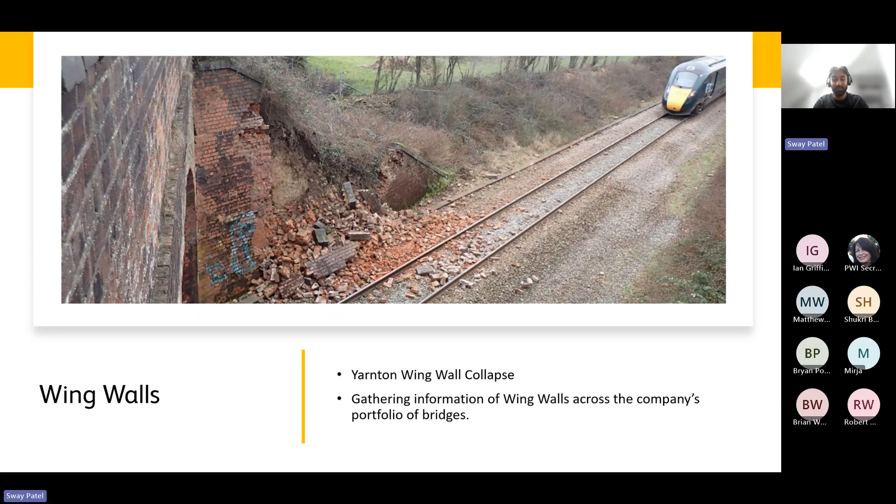This analysis helps identify and prioritize specific factors, which I then included in the RAIB reports. This report, when released, is aimed to provide valuable insights for those in the routes and regions, guiding them on which bridges to prioritize for assessments and renewals, and how to approach them effectively. Working on this project has been an incredible learning experience, teaching me a great deal on technical aspects of bridges, potential risks, and the efficient approaches that are used to address these issues.

All bridges and other structures will inevitably degrade over time, and given the great number of bridges in the company's portfolio, it is key to track this with a tool. From December 2024, I have been contributing to the development of the degradation and capability model. This model aims to help identify the condition a specific bridge will be at given a specific time. The benefit here is to effectively structure the priority list for future asset renewals.

I've been contributing here by feeding inputs such as the latest asset condition, capability information, BCMI condition, etc. into the model by collecting it from the CP6 and CP7 workbanks with the support of asset engineers helping me to locate it within the workbanks, and delivering this information to those in the renewals team working on the model itself. This has been great in developing my confidence and team working skills, as I've been working with two parties both outside of the structures team, who I would normally be familiar with, where I'm delivering stuff to a group entirely on my own.

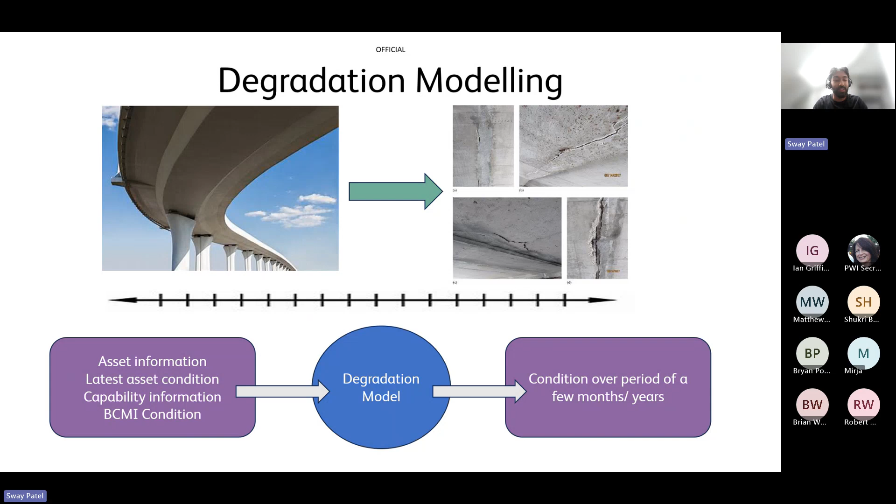I recently took on a new project focused on metallic bridge fatigue. Mott MacDonald, who we've been working alongside, has been developing an assessment tool for the structures team here at Network Rail to use. And I had the opportunity to be the first person in the company to trial this tool. Now, my role involves testing its functionality and identifying any limitations that need to be addressed.

I began this project in February this year, and it has required a significant amount of technical knowledge, not only in assessments, but also in understanding specific topics like metallic fatigue and the workings of a U-frame in bridges. Most of the efforts that I've put in for this project have been towards understanding these concepts before I actually began doing anything towards the tool itself.

As I started feeding the tool with information from bridge assessments, I encountered challenges in finding the correct data to meet the criteria and locating this information. These obstacles have slowed down the process of the project. And despite these challenges, I've developed strategies to overcome them, such as creating a systematic approach to data collection and verification. Despite the slow pace, I have thoroughly enjoyed the process so far, and I feel like I will continue to.

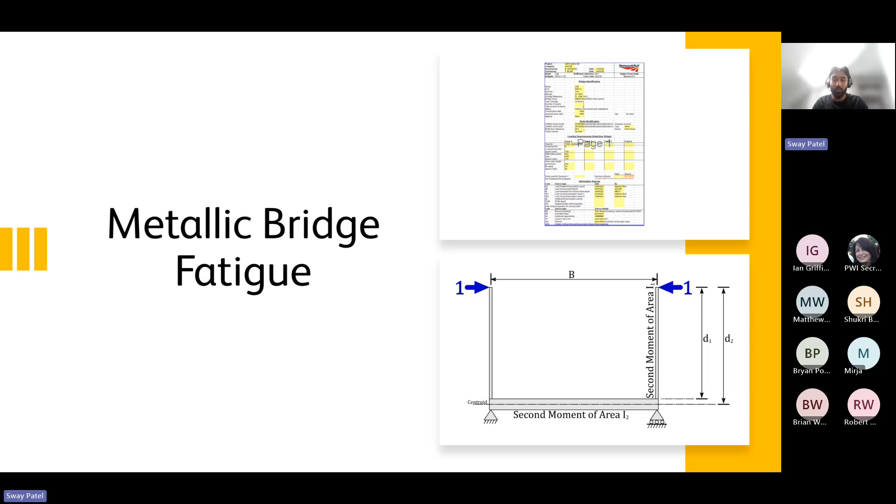Looking ahead, there is still much more to be done in this project. I aim to further enhance my technical understanding of metallic fatigue and bridge assessments. My goals here are to strengthen my knowledge to the point where I am comfortable in identifying issues or limitations to do with the tools based on my own understanding. This will not only benefit the projects, but also support my studies when I return to university for my final year.

During my time at the company, I, alongside the other year in industry students and graduates, participated in numerous site visits across England. These visits allowed us to observe various projects across multiple disciplines within the company. These visits included the National Railway Museum, the HS2 tunnel construction in London, tours to the Waterloo and Birmingham New Street stations, and one that I found particularly fascinating was the visit to the Shrewsbury signal box.

At Shrewsbury, I was intrigued by how the staff managed signal changes and communicated with train operators using Morse code. Their ability to comprehend the complexity of simultaneous activities and execute the tasks efficiently both surprised me and interested me. This experience has really increased my enthusiasm to explore more aspects of the company beyond my discipline.

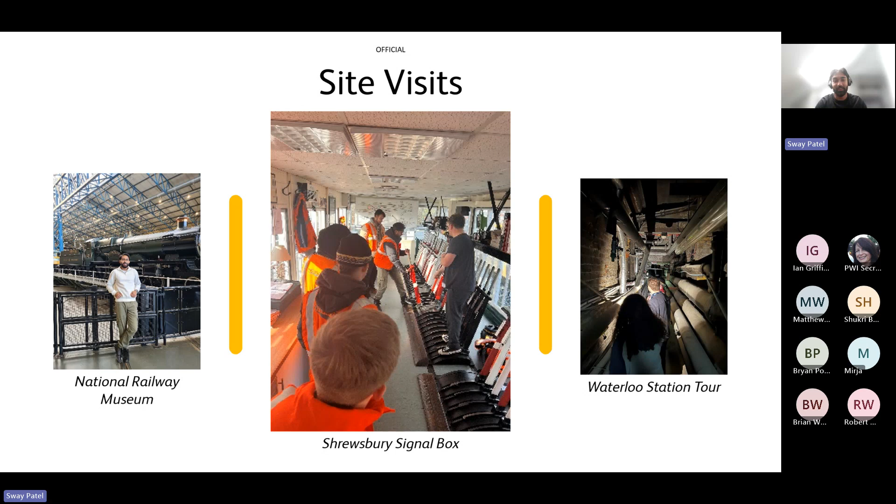Another visit I undertook with a member of the structures team, my colleague Daniel, was to the Lake District, where we inspected 5 assets as part of the third engineering verification. Our objective was to visually assess whether the examinations conducted by the regional team accurately reflected the actual condition of the bridge.

During the visit, Daniel provided valuable insights into coastal defences. He explained things such as strategies, including the types and sizes of rocks, stones, and boulders used in coastal protection. This hands-on learning experience was incredibly informative and broadened my understanding of the practical applications of engineering principles.

Furthermore, the Year in Industry scheme has been incredible in providing opportunities for us to develop our interpersonal, organisational, and management skills beyond our respective teams. The experience I enjoyed the most was organising and hosting a work experience week for Year 12 students to explore engineering within Network Rail. Although it was just a week-long event, it required extensive planning over a month in advance.

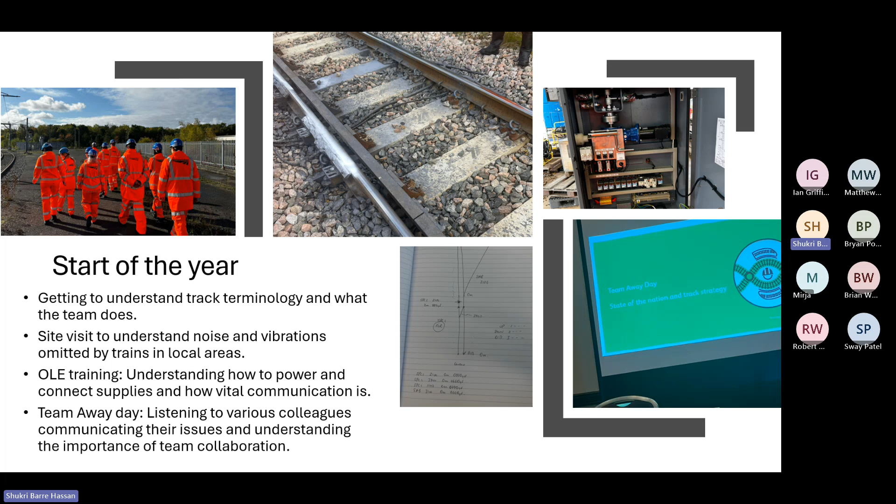And yeah, we also had a team away day a few weeks into when I first joined. So it was just meeting everybody and listening to what their issues were and understanding the importance of team collaboration. Here are some trips and visits that I've managed to go on. So throughout the year, I was lucky enough to go on several educational and inspiring trips. Each gave me a unique perspective on how railway operations and maintenance are handled in different regions.

So I did get a chance to go on the new measurement trains, which is to do with track geometry. And it was really interesting seeing how, as the train goes by, it's accurately producing data based on the track that we'd be passing over, and it would show us the different faults and to what level each fault was visible on each section of track.

I also got to go to Birmingham New Street and London Waterloo for in-depth tours. We got to go into the restricted access areas, so we went underground into different tunnels, and it was a very cool experience. We got to visit the Victoria Channel box for HS2. It is massive. It was a really big tunnel. I remember being told that people go deep down into the tunnel, and they'll spend like a 12-hour shift in there and come out 12 hours later. And I thought that is serious dedication. It just shows how hardworking people are.

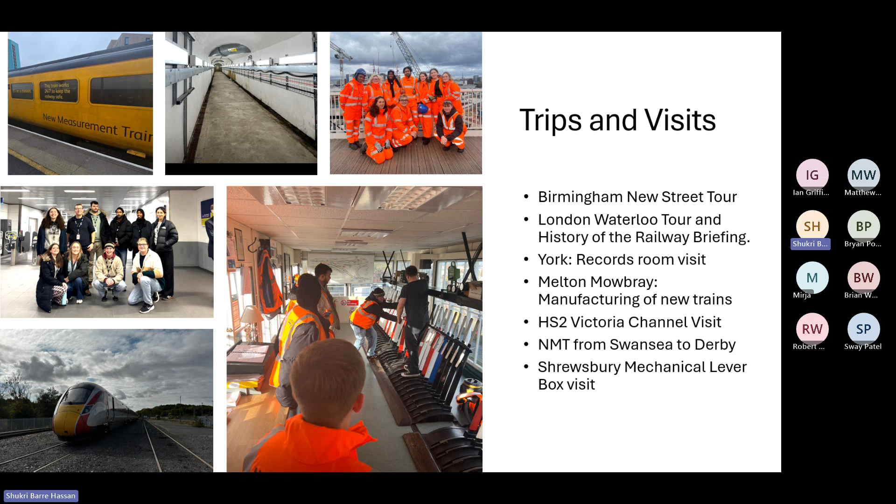Again, from what Sway said, we did go to the mechanical box in Shrewsbury. We all got a chance to pull the levers and see how it was doing. The levers are very, very hard to pull. Do not underestimate them. But yeah, that was all really interesting.

So some work and tasks that I've done. So I started off the year by learning about product acceptance and the process of acquiring it. So this is a critical process that ensures any new product, whether it's a new sleeper material or fastener, meets Network Rail's strict safety and performance standards before it's deployed. I also reviewed standards to understand the criteria that products need to meet. This involved going through some technical documentation, test protocols, and some approval processes.

And touching on the sustainability theme at Network Rail, I have been doing some research into sustainable alternatives for traditional concrete sleepers. So we've been organizing with a company in Europe which is manufacturing thiocrete sleepers, which are made out of a sulfur material, to be tested in the UK hopefully soon. So that's something that I've been working on. That's one of my main projects.

Another task is I worked closely with other manufacturers on screw testing. So we looked at how different screw types respond to stress, weathering, and operational forces, which is vital for long-term track performance. And I got to create a derailment report on a past occurrence, which was really challenging because it's a lot different to what I do at university. And I had to look into possible causes such as screw failure, material fatigue, and installation issues. It's a real-world application of engineering analysis and risk management.

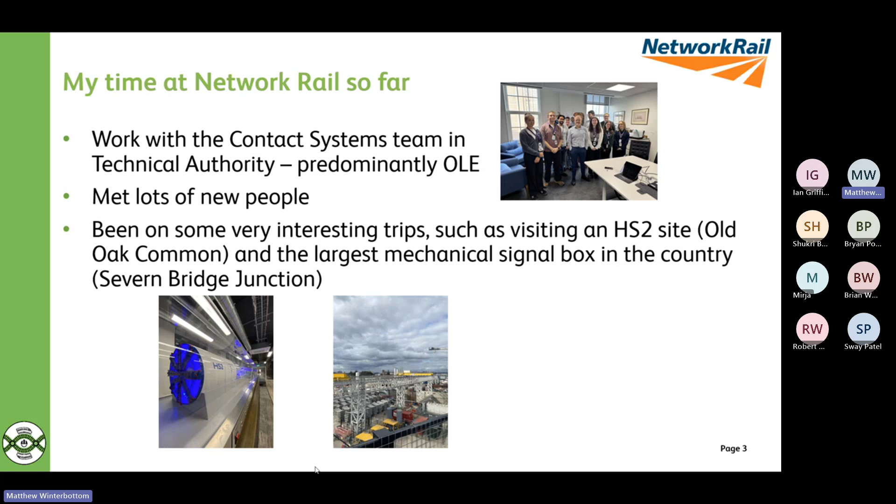Lots of interesting trips. So we visited the HS2 site at Old Oak Common, like Sway and Shukri have said, and obviously the Severn Bridge Junction signal box in Shrewsbury, which was really cool to see.

Here are some of the things that I have done with my time at Network Rail. So, as Shukri said, we went to Walsall to do some OLE bespoke training. We learned about communication between line side and the ECR, how to handle isolations and how to apply and remove earths.

Nominated person electrical safety training material. So me and my colleague Aaron Brandrick updated the previous training material to make it more accessible to those who were undertaking it. And as I was a fresh set of eyes, it was quite handy for me to be in the same position as those who would be taking it. Design for reliability. I learned about what goes into designing a product to allow it to be used on the railway for extended periods of time.

Enginuity 2025. While this probably isn't directly related to Network Rail, we are doing it through Network Rail. So it's a competition that me and a few of the other year in industry and grads have entered. And we're tasked with running an engineering company and trying to become the top company in the world. The new leaderboard was published today, and we are, I think, in 89th out of 115. So we're not very near the top, but we are not last. So that is a positive in my eyes.

And then this is the project that I'm going to do a little bit of a deep dive on, the carbon cost of electrification. It's been pretty much the majority of my last 3 months here. Shukri and Sway will be bored of hearing about it, but I'll go into quite a lot of detail on it now.

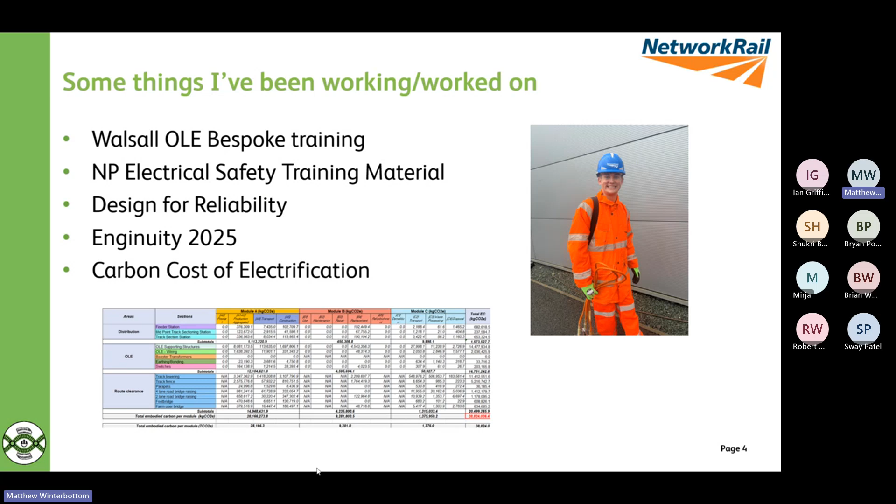So a little bit of an overview of the carbon cost of electrification. As the UK approaches its net zero goal of 2050, reduction of railway emissions plays a crucial role. The railway emits 1.4% of UK transport emissions and 0.5% of total UK emissions. Travelling by train emits 3 to 5 times less carbon than driving per person per kilometre, around 6 times less carbon than flying per person per kilometre, and a single freight train may be able to remove up to 70 heavy goods vehicles from the roads.

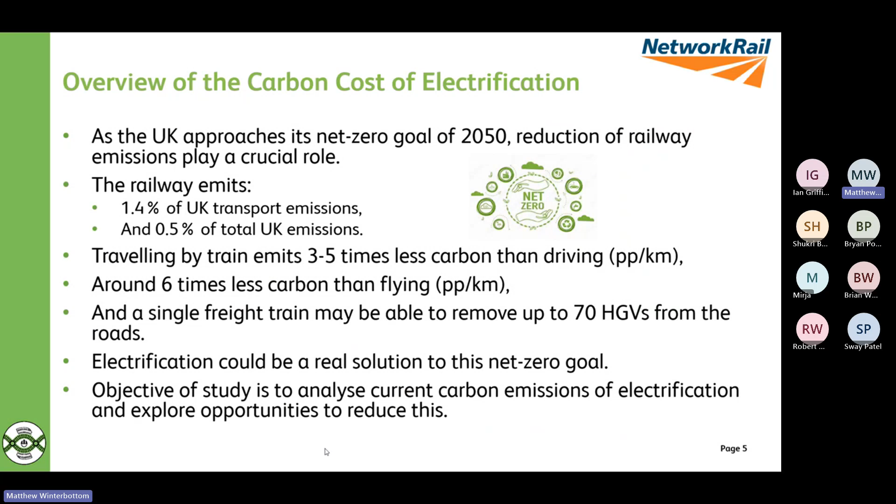Electrification could be a real solution to this net zero goal, and the objective of this study is to analyse current carbon emissions of electrification and explore opportunities to reduce this. So initially, I researched the plans and strategies of rail-based institutions and organisations. This came from the RIA, RSSB, DFT, the TDNS at Network Rail, Transport Scotland and Transport for Wales. All of them are committed to net zero and have action plans to achieve this by 2050.

However, Transport Scotland have plans to achieve net zero by 2045. All institutions mention electrification as a primary contributor to net zero. Some mention hydrogen power, the complete removal of diesel trains by 2050, and battery power to achieve multimodal optimization.

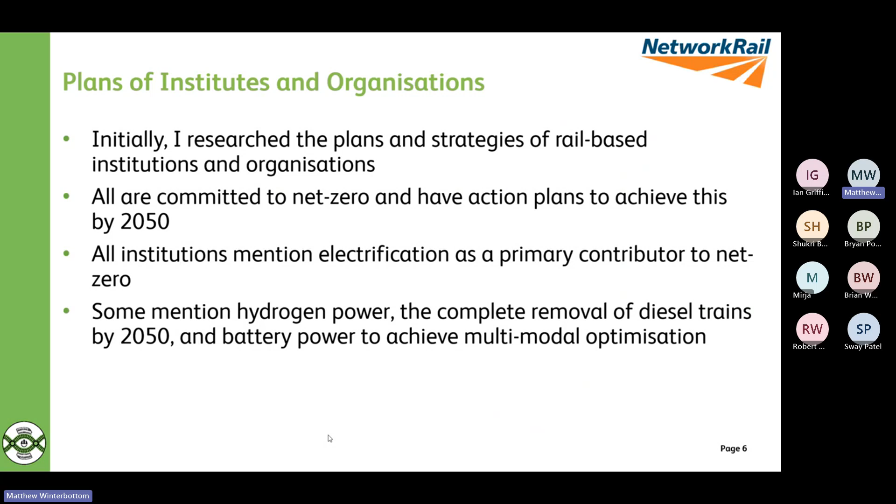Grid connections weren't included in the study, as there is quite a large variation of carbon emitted depending on the distance between the connection point and the line side. For instance, a grid connection 5 kilometres from the line side would emit significantly more carbon than one that was only 500 metres away.

Then I used PAS 2080, which is a whole life carbon management strategy provided by BSI. It splits carbon emissions into modules, which have sub-modules within them. Module A is the before use stage, so modules A1 to A3 are the production, module A4 is transport to site, and module A5 is construction once on site. Module B is the in-use stage; B1 to 5 are use, maintenance, repair, replacement, and refurbishment respectively. Module C is the after use or end of life stage, so C1 to C4 are demolition, transport, waste processing, and disposal.

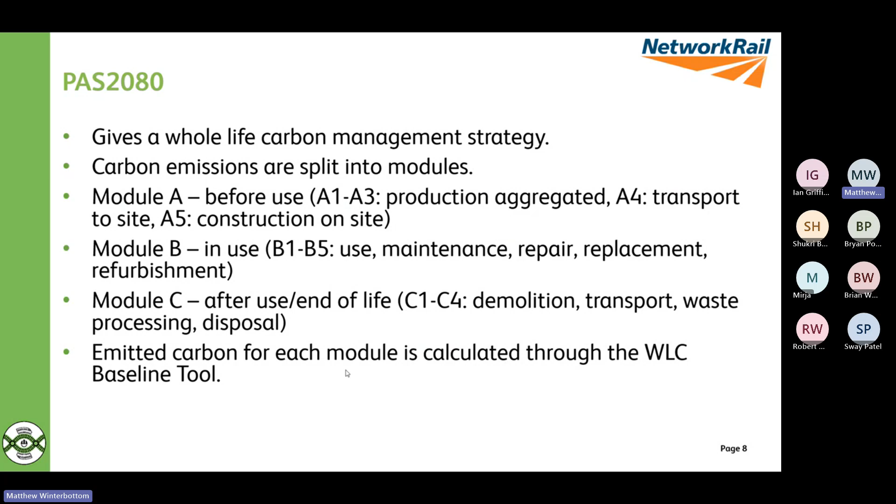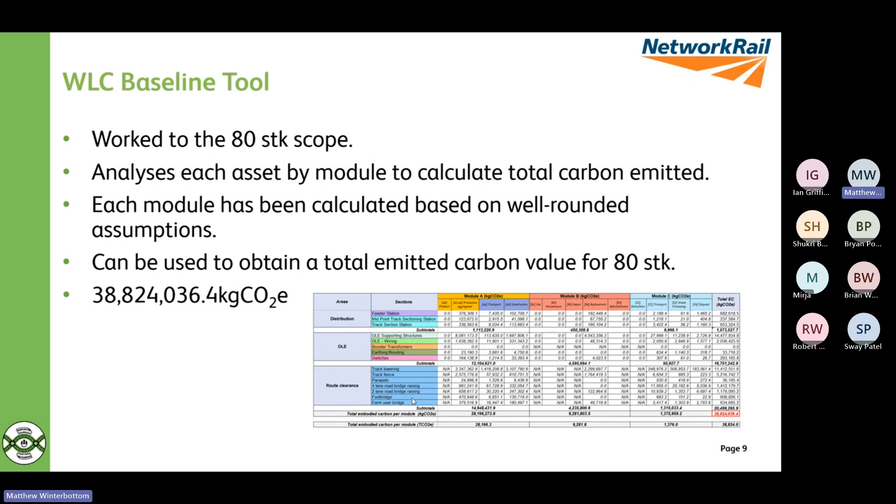Emitted carbon for each module is calculated through the WLC baseline tool, which we'll have a look at now. The WLC baseline tool is a spreadsheet created by Expedition and checked by Ruth Thomas, worked to the 80 single track kilometre scope. It analyses each asset by module to calculate the total carbon emitted. Each module has been calculated based on well-rounded assumptions with data from the rail carbon tool provided by Bath University. It can be used to obtain a total emitted carbon value for 80 single track kilometres, which is nearly 39 million kilograms of carbon dioxide. That would take far too long to read, I think.

These are the findings from the baseline analysis. The main areas of carbon dioxide emissions are route clearance and OLE supporting structures, due to such a high amount of metalwork that is required to build them. Over 90% of total emissions are from these two areas, meaning that they have the highest potential for reductions.

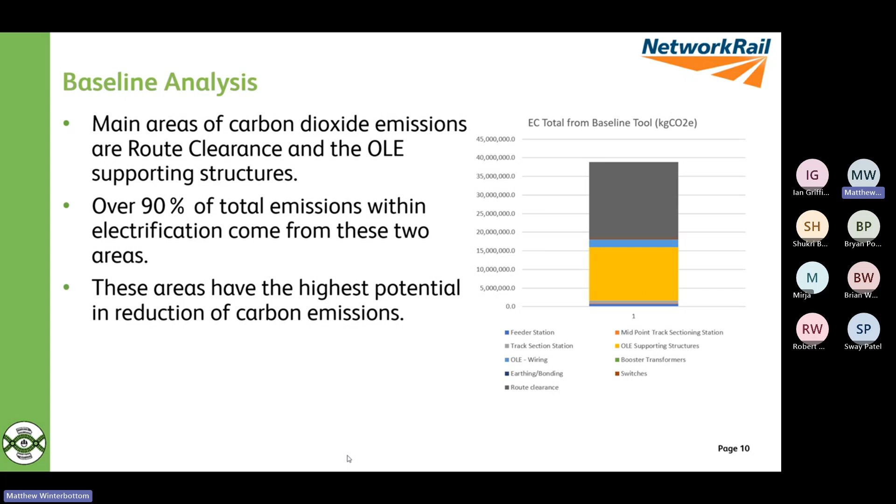So this was the first scenario that I looked at to try and reduce the carbon emitted by electrification. Route clearance is the biggest carbon cost of electrification. In the baseline, it was assumed that tracks are renewed when they're lowered, when they probably don't need to be. If tracks are reused instead of renewed, there is an estimated carbon reduction of around 2.9 million kilograms of carbon dioxide, which is approximately 25% of all carbon emitted by route clearance.

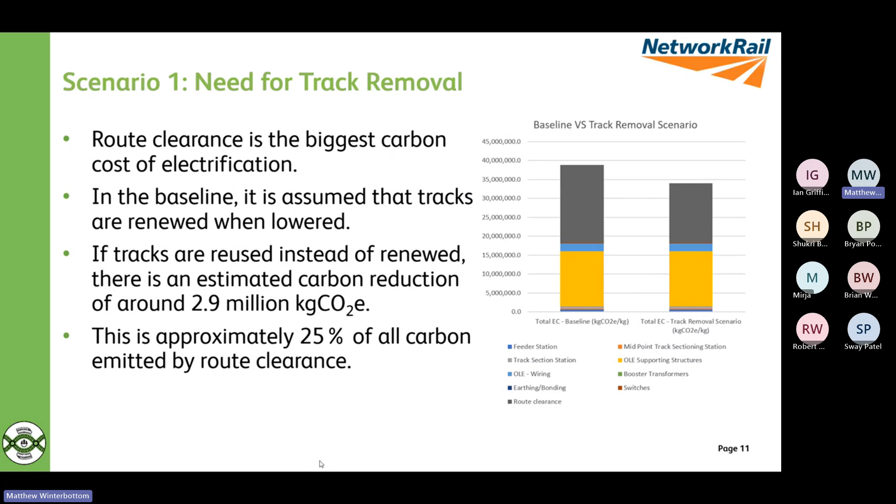This was the second scenario using discontinuous OLE. If it is used in an assumed ratio of 3:1 electrified to non-electrified, 25% of OLE supporting structures and OLE wiring can be removed. This gives a decrease of around 4.1 million kilograms of carbon dioxide in the OLE area.

So properly planned electrification. By properly planned, I mean taking into account bridges and tunnels to potentially allow areas where previously electrification was thought to be needed to be avoided. It is assumed that this would negate the need for route clearance in 75% of cases, saving approximately 15.4 million kilograms of carbon dioxide.

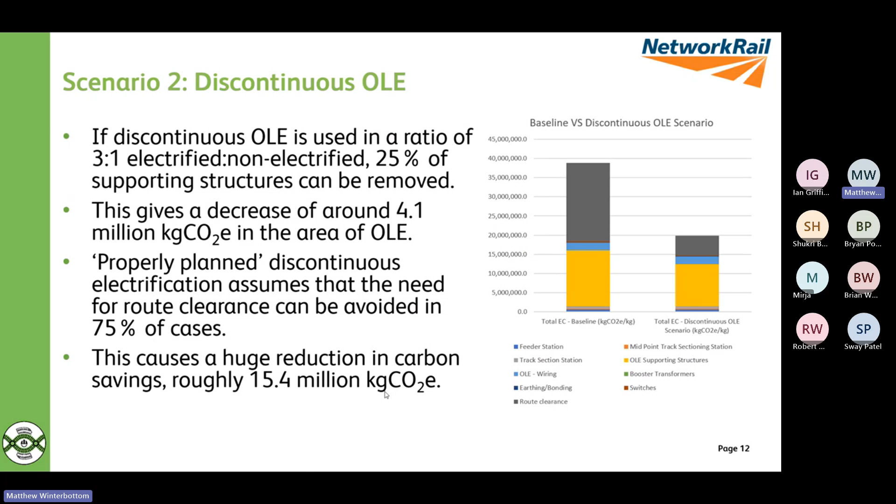However, some costs must be added back on, such as troughing and cabling to connect adjacent sections of discontinuous OLE and potential whole life carbon emissions of batteries. Batteries or another method of power may be necessary to allow trains to be powered when not under OLE. For instance, if an incident happens and a train has to come to a stop, it needs to have a way to move off again.

The carbon emissions of troughing totals to 294,400.1 kilos of carbon dioxide, and the emissions of the XLPE cables used are not available, but it is highly unlikely that they will come close to the reductions made through the discontinuous OLE. One 4,800 kilowatt hour battery electric multiple unit emits 350,400 kilograms of carbon dioxide in its lifetime. Therefore, the reductions made could be used elsewhere to retrofit 55 diesel trains with batteries.

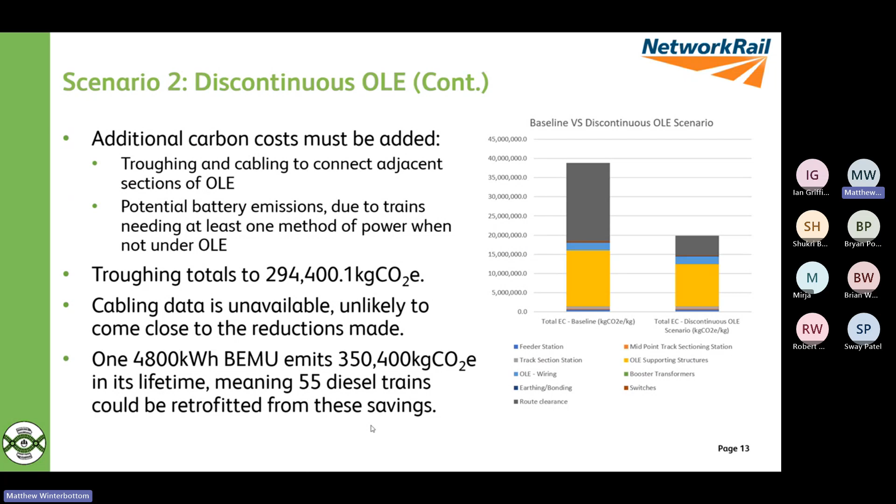So the third scenario I looked at was the use of low carbon copper conductor wire. And while it may only be a small improvement, it is still an improvement. It is a wire supplied by Elka Wire and would replace the current contact wire that we use. And they have an environmental impact assessment on their website. The wire uses very efficient ore concentration processes and a world-class green energy mix to allow for a saving of 150,000 kilograms of carbon dioxide emitted per 80 single track kilometers.

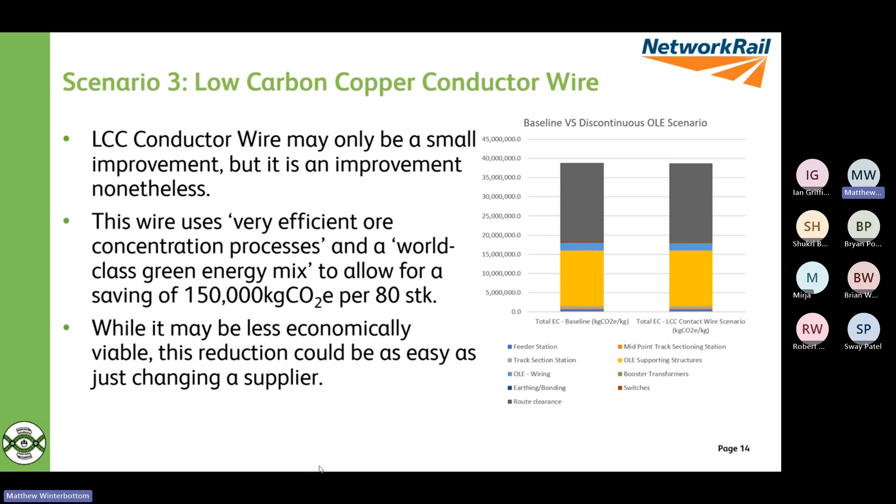And while it may be a less economically viable option, this reduction could be as easy as literally just changing a supplier. So where we get our wire from now, moving over to Elka wire would cause this huge reduction in emitted carbon dioxide.

There were some scenarios that I looked at which seemed to have a bit of a negative outcome. So composite masts made of carbon fiber reinforced polymers. There wasn't enough data to accurately calculate carbon emissions of CFRPs. Some values were given that CFRPs are 5 times more energy intensive to process than steel. Some said 15 times more energy intensive. If the latter values are true, CFRP masts would need to be 15 times lighter than steel to make it worth using them to allow more to be transported at once and avoid transport emissions. CFRP is not able to be recycled at the same extent as steel either, so the processes used are either far more expensive or will yield very poor recyclability.

Another negative scenario I looked at was the in-house component manufacture. So essentially bringing in materials to manufacture components in the UK to avoid overseas transport emissions for components. However, the materials to make components must still travel from their origin, so it doesn't make too much of a difference whether it's built outside or inside the country. You would still need to transport things somewhere. Also, if in-house component manufacture was adopted, there would be an increase in UK emissions due to the production of the components, and therefore I thought it would provide more of a detriment than a benefit.

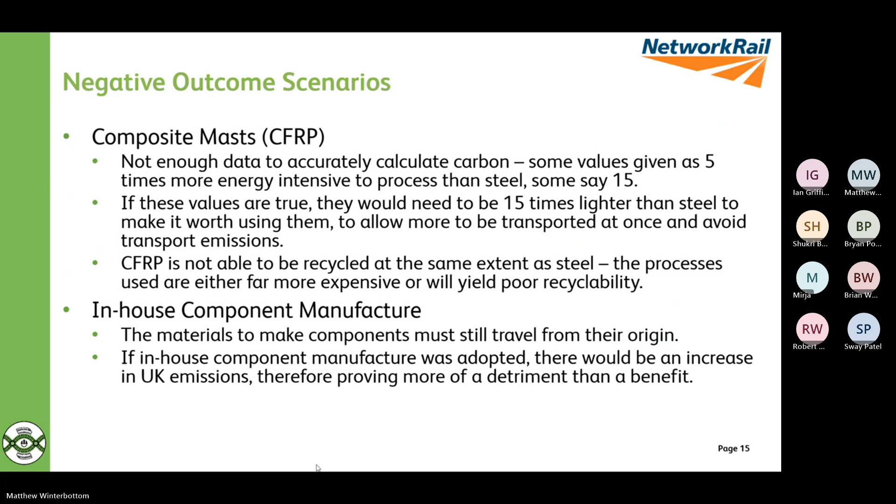So here we have some of the break-even points. Now the break-even point for each scenario has been given as a graph here. They're utilised to give an approximation of the timescale required for the reduction in carbon dioxide emitted via electrification to outweigh the carbon dioxide emitted by diesel trains.

So the baseline shows a break-even point of roughly 10 years in the future for infrastructure commissioned this year, with the crossover occurring in approximately 2035. This not only provides a reasonable assessment of how electrification will bring carbon costs down to approach net zero, but also that it can be majorly reduced in a relatively short span of time.

The route clearance one on the top right: the break-even point for the route clearance scenario is slightly earlier than the baseline, occurring in approximately 2033 to 2034, showing a positive reduction in carbon emitted in the initial construction and also a lower total emitted carbon by 2050.

The discontinuous OLE, bottom left, shows a massive reduction in the break-even point, approximately 5 years earlier than the baseline, leading to a significant overall reduction by 2050. This would cut the break-even point in half, meaning a much quicker long-term carbon saving. This graph is shown without the emitted carbon from battery electric multiple units, as they are outside the scope of the study, but this carbon dioxide emitted should still be considered.

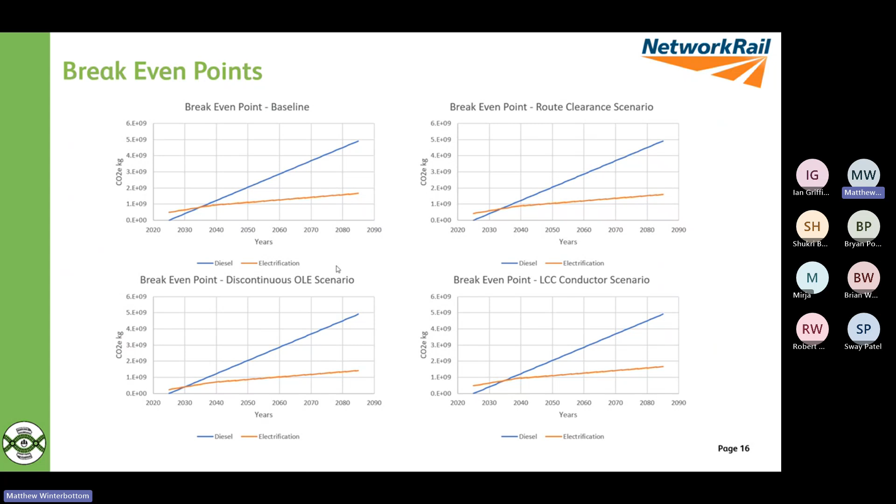And then in the bottom right, we've got low carbon copper conductor, and it looks like on the graph that it doesn't produce that big of a reduction in time for the break-even point, but it is, as we saw on the last few slides, still a reduction. So using it alongside another form of carbon reduction would make it even lower. Say you used low carbon copper conductor alongside discontinuous OLE, that would push further than if you used one or the other.

So some of the conclusions I came to through this project was to reuse track that is removed during track lowering. This will save approximately 3 million kilograms of carbon dioxide emitted. Discontinuous OLE would save approximately 19 million kilograms of carbon dioxide, and low carbon copper conductor wire would save approximately 150,000 kilograms of carbon dioxide. These values are all linked to the 80 single track kilometers. So across the board, depending on how much electrification takes place, this could be a serious amount of carbon dioxide saved.

The composite masts, it's very difficult to tell. It's a bit of a grey area. It seems unlikely that there will be great, if any, benefit, and the use of in-house component manufacture is more likely to increase carbon emissions than reduce them.

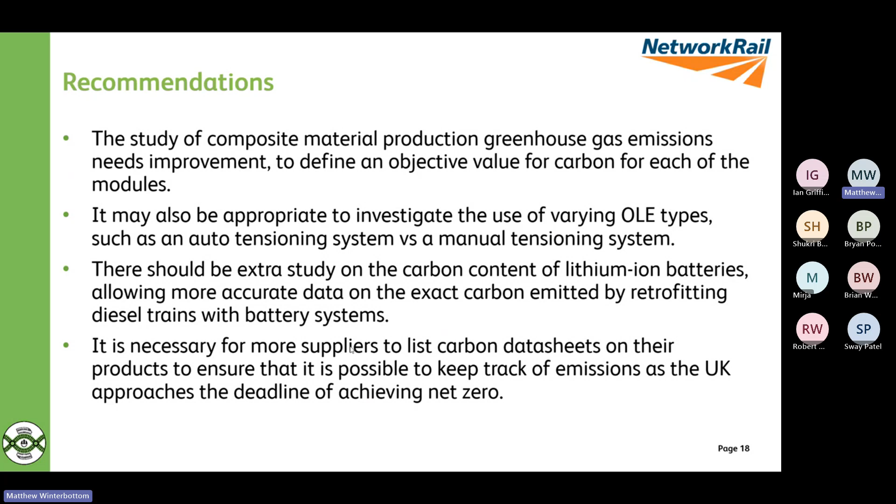And then finally, I just have some recommendations for the industry. So the study of composite material production greenhouse gas emissions needs improvement to define an objective value for carbon for each of the modules. It may also be appropriate to investigate the use of varying OLE types, such as an auto tensioning system versus a manual tensioning system. There should be extra study on the carbon content of lithium-ion batteries, allowing more accurate data on the exact carbon emitted by retrofitting diesel trains with battery systems. And it is necessary for more suppliers to list carbon data sheets on their products to ensure that it is possible to keep track of emissions as the UK approaches the deadline of achieving net zero.